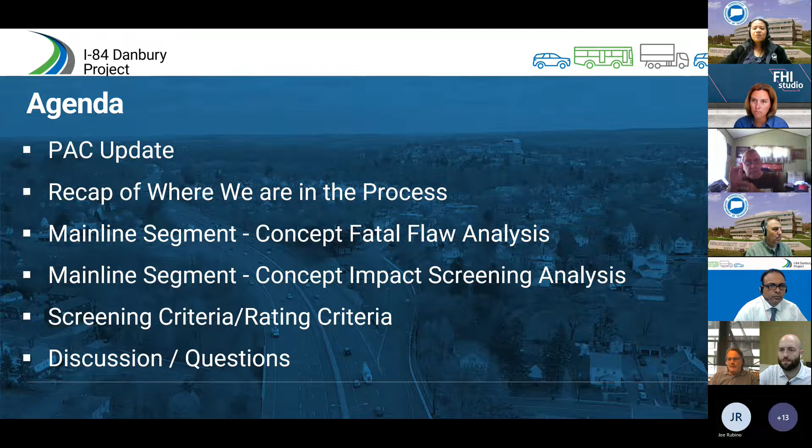Hello everyone, good afternoon. So for today's meeting, we're going to go over first, as usual, the PAC update. Then we'll recap where we are in the process. If you recall from our last PAC meeting two months ago, we talked about the engineering considerations, the environmental. So for today's meeting, we're going to go through one particular segment, the mainline segment, and go through the screening process of that. That's why we asked everyone in our email to specifically look at concepts 1, 5, 8, 9, and 22 — a total of 5 concepts, because we're going to look into that with the mainline segment. Then after that, we're going to go through the screening criteria, rating criteria, and we'll end with discussions and questions. Next, please.

So for the PAC update, since our PAC update 2 months ago, we added more concepts on our website. There should be 14 concepts, between 1 and 14, plus concept 22 on our website.

Then 2 months ago, we also attended the leadership meeting hosted by the Danbury Chamber of Commerce. It was me and Sharat who attended this meeting.

We also attended pop-up events in the city of Danbury. We're also active on our social media accounts, Instagram, Facebook, and Twitter. Lastly, we don't have any changes with our PAC.

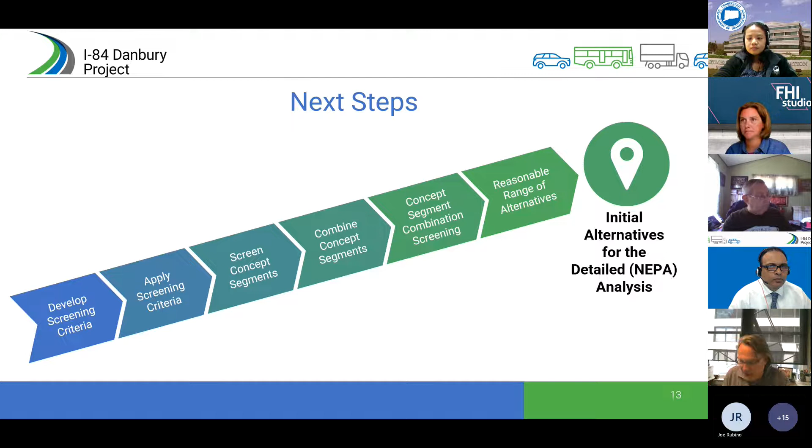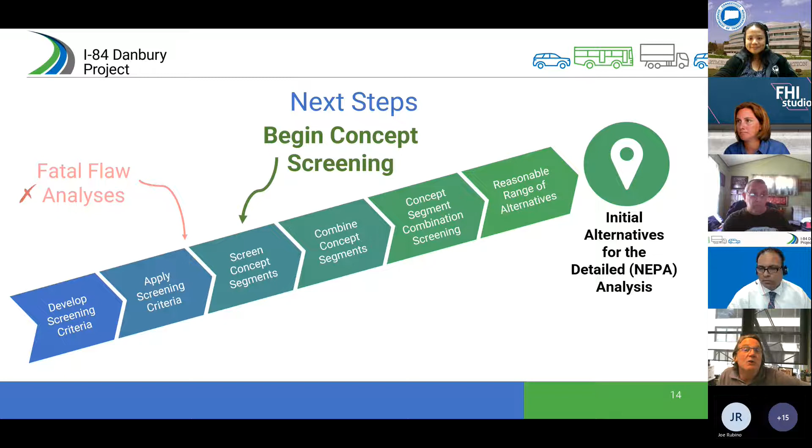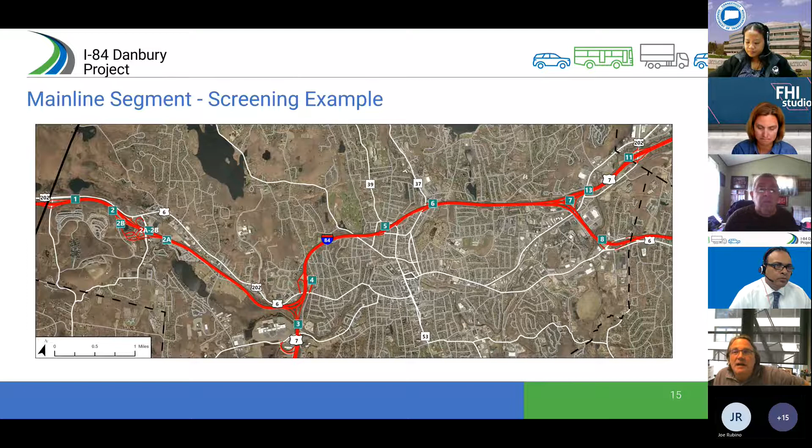As you remember, we've shown this arrow multiple times, and last time we talked about our fatal flaw analysis, and we've now begun to screen each of the concepts. This meeting will show only one segment, the mainline segment. The mainline segment goes through the entire corridor. We've also broken this out, because of the complexity, into the west segment, the center segment, and the east segment. But today we're focusing on the entire mainline segment, and we've labeled some of the main roads so you get a feel for where this mainline is.

In our screening process, we've gone from fatal flaw to redundancy to this impact matrix analysis. Chrislene reminded you that the 5 concepts proposed for the mainline are: concept 1, add a lane; concept 5, the left to right hand ramps; concept 8, I-84 under a collector distributor road; concept 9, Route 7 express lane in the median; and concept 22, I-84 express lane in the median.

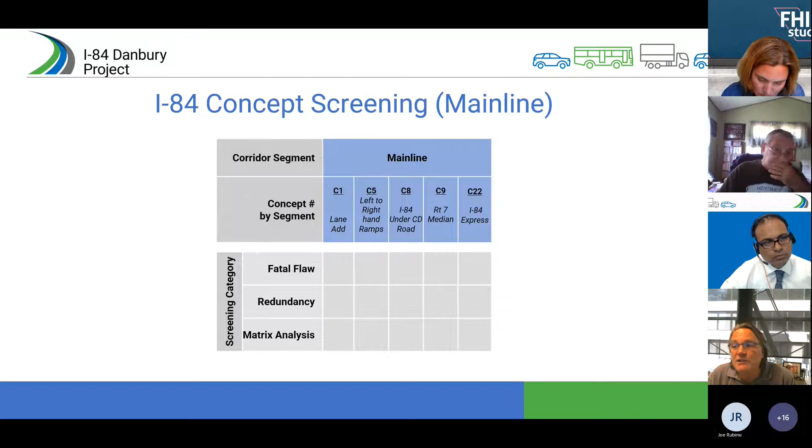How we're going to present these is we'll go through them, and we'll let Sharat describe the different components of some of these concepts. Our first one is concept 5, the left hand to right hand ramps for the mainline. Sharat, do you want to talk about it? We've highlighted 2 areas here. Can you give us an update on what these actually mean?

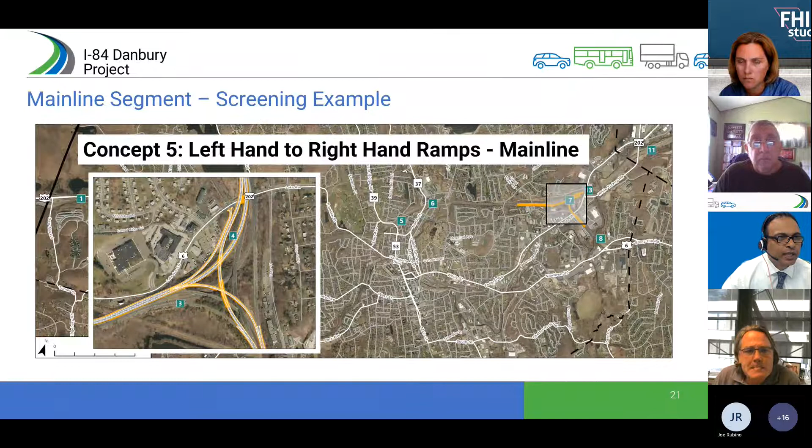Sure. Concept 5, the left-hand to right-hand ramps, came about around the same time as concept 1 with the lane add. In concept 5, we are looking at interchanges 3 and 7 and just switching the ramps from the left-hand side to the right-hand side. At interchange 3, we are switching the northbound Route 7 ramp to 84 westbound to the right side; today it's on the left side. Then the westbound 84 to southbound 7 movement, we are also switching to the right side at interchange 3. Similarly at interchange 7, we are switching the 84 eastbound off-ramp to the right side to Route 7 north, and the movement from Route 7 southbound that comes on the left side of 84 eastbound is switched to the right side. We're not making any other changes besides those 2 interchanges in concept 5.

The next concept is concept 8, where I-84 actually goes under the collector distributor road for the mainline. We've got 3 specific locations, one to the west, one to the center, and one to the east, that we can highlight to show what it looks like.

This concept came in the middle of our concept development process, and we were thinking about how we could take the through movement of 84 completely out of the Danbury area. The idea is to depress or lower 84 below grade at interchange 3 and take it all the way down below grade to interchange 8. Roughly between 7 and 8, 84 would be daylighting back again, so 84 would be entirely below grade there.

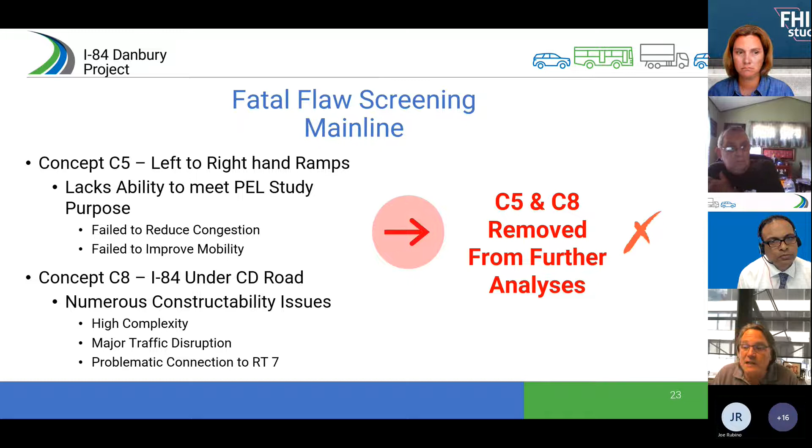It had major traffic disruption and was highly complex. So 5 and 8 were removed from further analysis through the fatal flaw screen. In our process, we go from fatal flaw to redundancy, and neither C1, C9, nor C22 were redundant in their functions, so there was no redundancy removal, and they made it through to the matrix analysis.

So if you recall, the whole mainline segment—Sharat, go over concept 1 and what that means. We've highlighted these three areas just so you can see what it would look like: here on the west, in the center, and on the east.

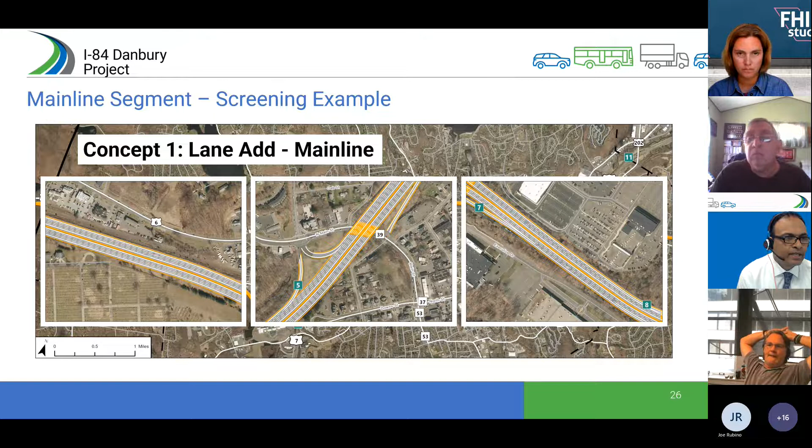This is the concept you probably saw the very first time, concept 1, where we just add a lane and maintain the lane continuity. We also switch, as part of this concept, the left-hand to right-hand ramps at interchanges 3 and 7. This achieves the benefit of maintaining the same number of lanes for through traffic across the corridor.

This is something you've seen at an earlier PAC meeting. Remember, this is a planning level—these aren't engineered, these aren't designed. This is Sharat's team coming up with the best visual we can show, but also note the width of the footprint for the add lane, because that'll come into play later when we're looking at impacts.

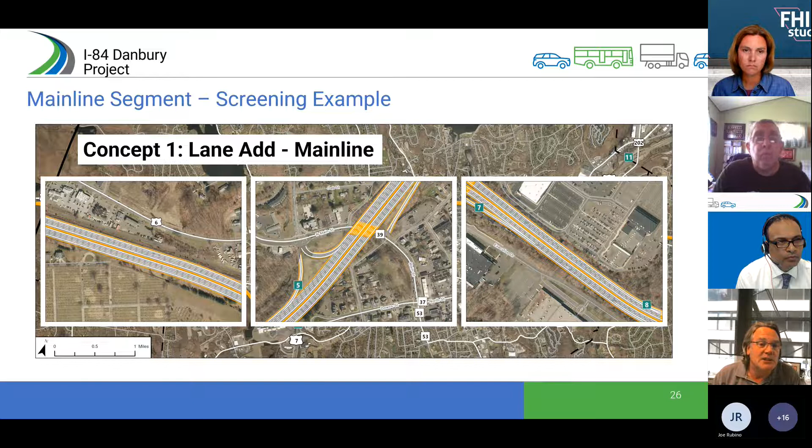Our next concept is concept 9. Once again, we picked three locations that highlight what these look like. That's when we're putting Route 7 in the median as an express lane, if you will, between the I-84 travel lanes. We've got one on the west side, one in the center, and one on the east side.

First, I'd like you to note the difference in width of the footprint. Again, I call this a crayon drawing—Sharat's team has put a lot more energy into it, but from a planning point of view, which is where we are in the process, we're just looking at conceptually what it could look like if we were to go to design.

So this one essentially provides Route 7 as an express. From interchange 3 to 7, Route 7 traffic does not have to mix with 84 traffic. All the Route 7 traffic would be in the median section in the two lanes, and they would be able to almost go direct connect to interchange 7 or from interchange 7 to interchange 3. There is a provision for local traffic on Route 7 to get off and onto the 84 piece of it to the sides, but between 3 and 7, Route 7 does not have any local access.

So it certainly provides a pretty straight direct connection for Route 7 traffic. As Rick said, this does provide a wide footprint. There's separation between I-84 and Route 7 with wider shoulders and barriers and things like that. So in comparison to Concept 1, the footprint from end to end is much wider than what it is there.

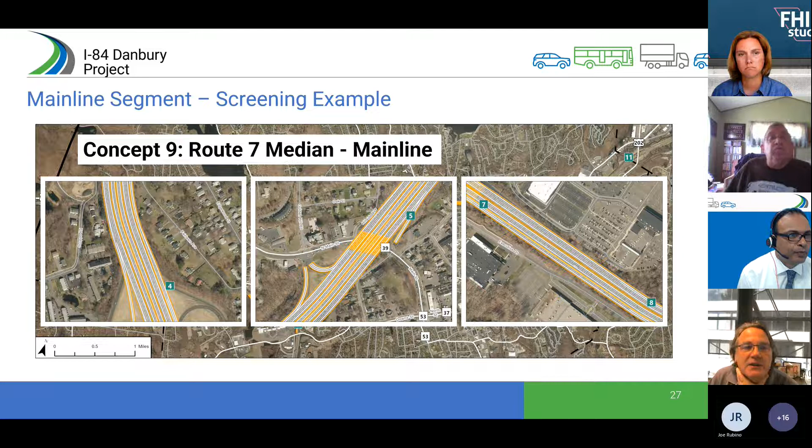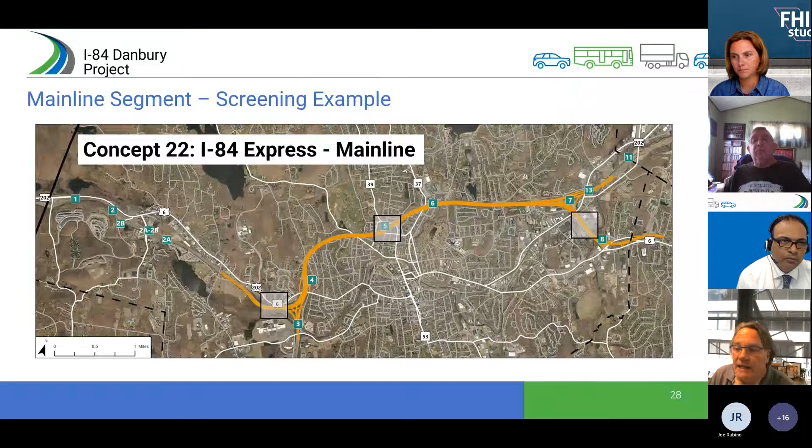Thank you, Sharat. And then if we go to concept 22, which is the I-84 Express, it would be in the mainline between the flow-through traffic on Route 7. Again, we've got three example areas: the first on the west, then the center, then the east. Again, notice, if you would, please, the footprint width.

So 84 Express is kind of similar to the 7 Express that we looked at before, except in this case it's 84 that's getting the privilege, so-called, where 84 traffic—especially traffic that does not want to exit at local interchanges, that wants to go towards Hartford or Waterbury and things like that—has the option of choosing to be on an express lane in the middle, and the local traffic from 84 can then use the road on the right side.

They would mix with traffic on Route 7 and 84, and on the right side would be accessing all the local exits. Ultimately both those roads meet west of exit 3 and east of exit 7 and merge together. But again, it's a wider footprint because we're trying to accommodate 84 express traffic in the middle and local traffic on the outside.

We call these concepts because they are conceptual and not fully designed. But we're taking these concepts and looking at the order of magnitude of impacts from these crayon drawings, from these conceptual designs.

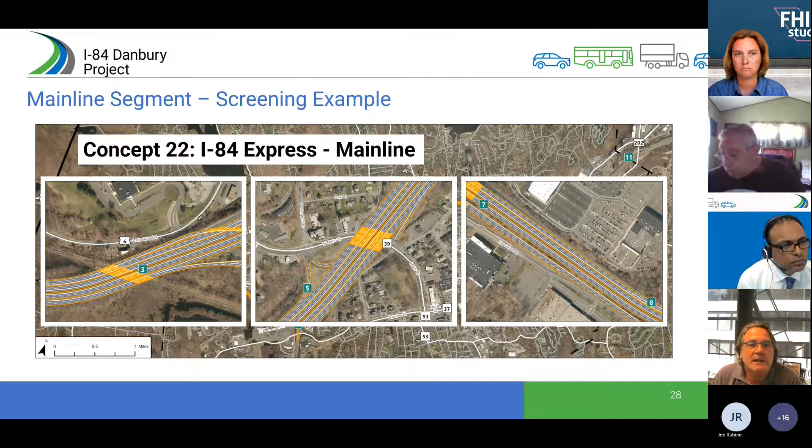If we go into our I-84 matrix analysis, you've seen these tables in other presentations, but let me remind you we have two types of matrices: one is engineering considerations, one is environmental. This one is engineering considerations, broken into key considerations and additional considerations. Key considerations are those that could strongly influence a decision as to whether we keep a concept or it fails through this matrix.

So in this example, for the main line, we looked at the reduction in travel time on I-84 in the morning and evening, and Route 7 in the morning and evening, and the reductions in the weaving amongst or between interchanges.

Sharat, reach through the screen and slap me and correct me if I misstate this. But these numbers are the modeled increase in delay that would happen at the design year of 2040 if no action was taken through this corridor.

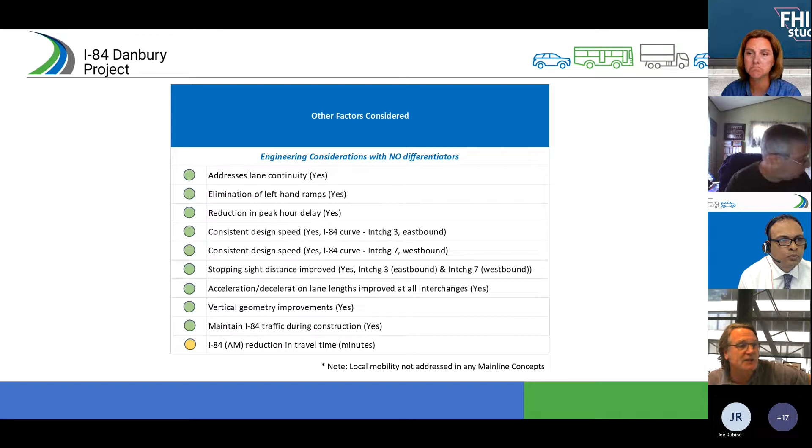So then we looked at the environmental considerations, and these mainly come in, if you recall, we asked you to take note on these concept drawings on the width. Concept 1 had a smaller footprint than did concept 9 and 22. Concept 1 was adding 1 lane to each direction on the existing footprint of I-84, where concept 9 and 22 had barriers and safe spaces and shoulders, as well as 2 lanes in each direction being added to the median.

So it doesn't surprise us to take a look and say our total number of property takes was much less in concept 1 than in 9 or 22. And a lot of those neighborhoods being impacted are sensitive and environmental justice neighborhoods, so concept 1 showed better than did 9 or 22. It's the same when we look at partial property takes and community facilities. We find that because the footprint is much smaller, concept 1 favored out.

Some of the non-differentiators we looked at were wetland type impacts, wetland and stream, and cemetery, and potential habitat for state listed species. They all impacted those resources to a similar degree. Also, everything is going to need a noise analysis, and there's a potential for floodplain impacts and impacts to the gas pipeline, and some visual and aesthetic impacts. And then all of them also performed to the same degree, but to a good degree, on the potential for 4F impacts, critical environmental impacts, listed state or federal species, and historic properties.

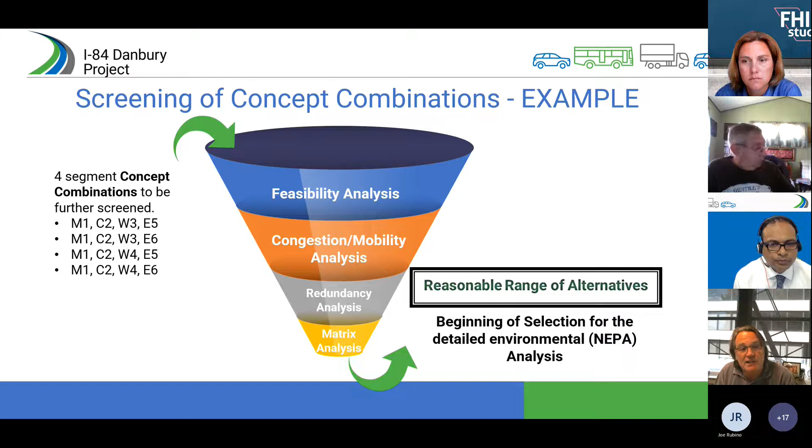Krishlene, were you going to go through this, or would you like me to? I was just thinking, Rick, maybe you take a pause and see if anyone has questions. A lot of information there.

Are there any questions or comments? Still looking pretty quiet. Oh wait, John has a question. Yeah, I have a question.

It looks like in the feasibility, concept 1 gets all the green lights. Thinking through the whole process, in past meetings we discussed the impact of accessing I-84 and Route 7 through Danbury, in other words access roads to get on and off the highway. What does concept 1, the green-lighted concept, do to minimize, alleviate, or help with accessing the highway?

Sharat, you want to take that? Yeah, I'll take that. So John, Rick, go back to the previous slide. This is just a piece, go to the next one. Yeah, this one, okay, this is just a piece of the pie. What we came up with for concept 1 is just doing the main line segment. As Rick said, there are 4 segments.

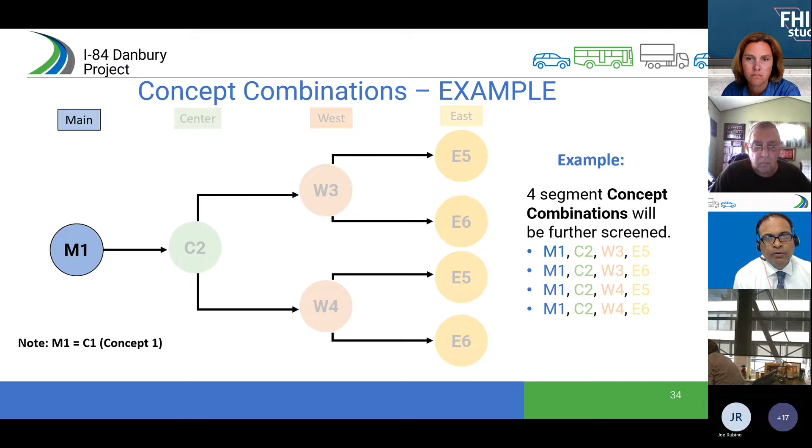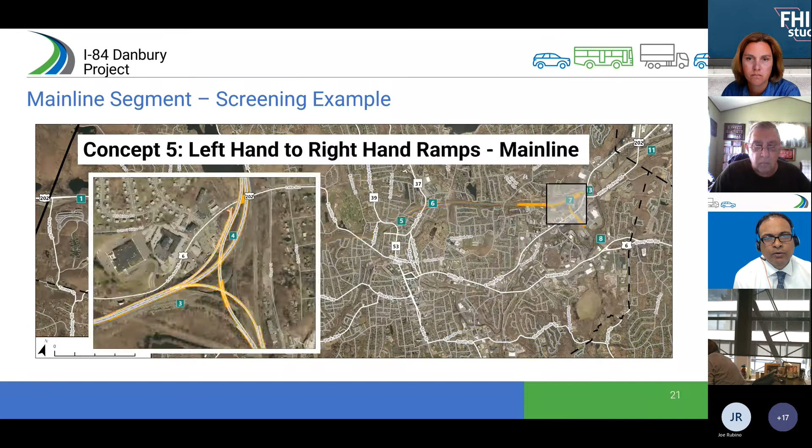And then we have something for the west where we talk about Lake and interchange 3, for example, so that's on the west side. On the east side, we'll get into interchange 7 and Newtown Road. Those are all part of a future discussion that Rick will talk about in the next steps. Those 3 segments are going to be in our next conversation on screening, similar to what we did for the main line.

So the main line just addresses the highway piece of it. What you're talking about here is local access, which will be addressed in one of those segments.

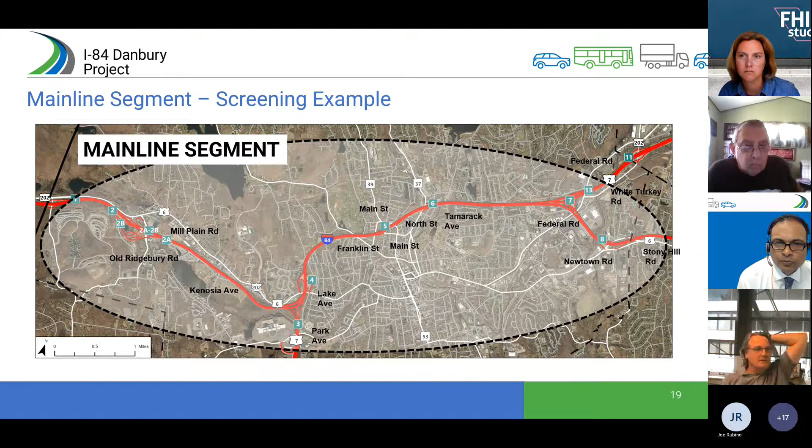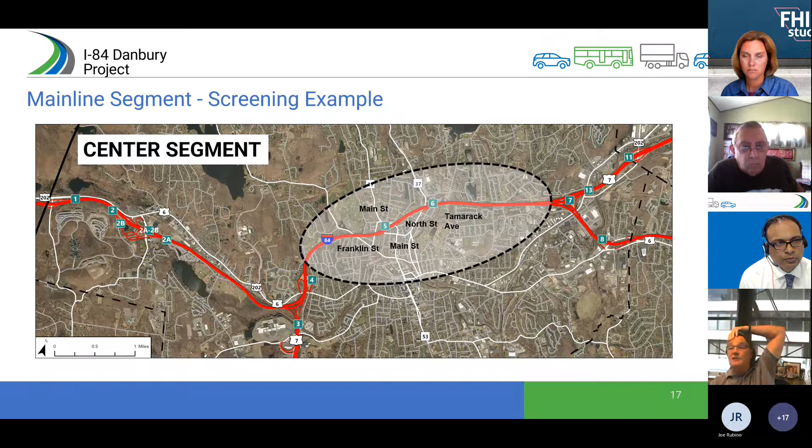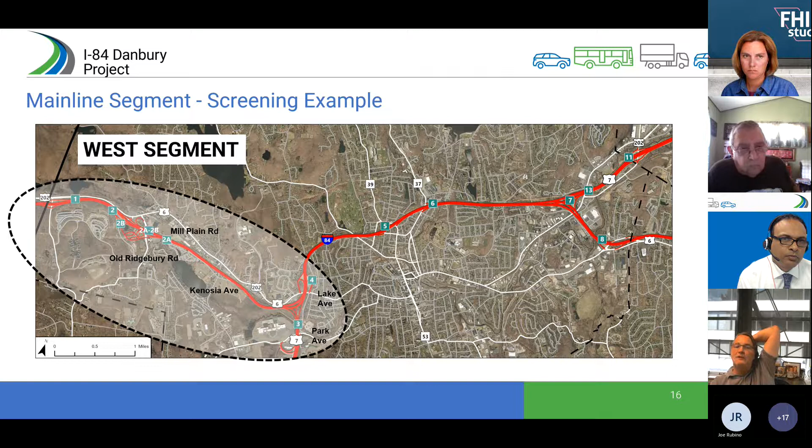As Sharad was saying, we will address these issues in the east segment and local access through there. Similarly, we will address Main Street and Tamarack and all of this access through the center segment, and then the access appropriately in the west segment. So John, this is exactly why it was broken down into segments, so we can better address these access points.

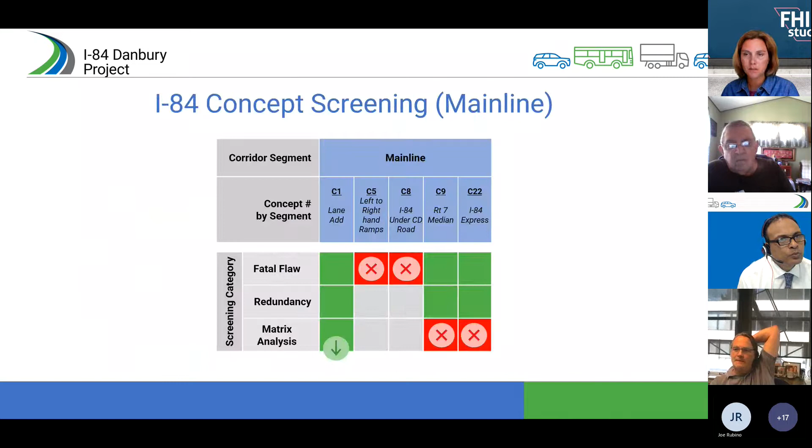Other comments or questions? I don't see any, Rick.

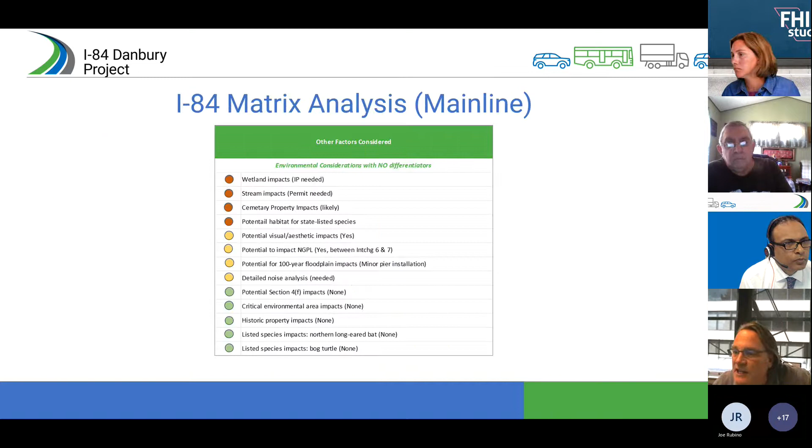Thanks, Marcy. So our next step is we are going to provide the entire PAC a set of materials. I'll show you, it's going to be these matrices, but without any dots. What I mean by that is we will show you all concepts that go into each of the 3 unscreened segments.

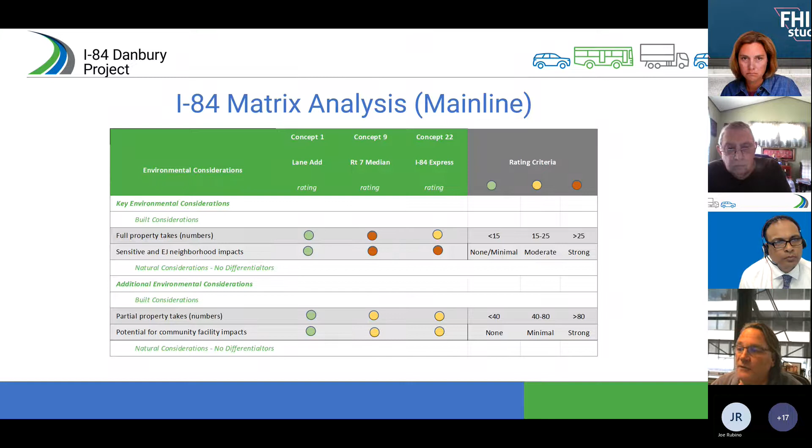And we will not have screened them yet, we will give you the tables. What we would ask of you in this next step is that you take a look at the west, center, and east and make sure that all of your concerns are met in 2 regards.

The first is, do we have every consideration in engineering, key and built, and environmental, key and additional in there to do our proper screening? And in the rating criterion, do you understand why we've chosen all those different criteria and the ranges of criteria, or the qualifiers like best, better, and great, or whatever we put in as a qualifier?

So we'd like to give you the time between today and the next PAC meeting to digest all of those. At our next PAC meeting, we would like to really open it up for a much more interactive discussion, so we can discuss all of the criterion and considerations and make sure everything you're interested in and have questions about is answered, and then we end up putting them into those screening processes.

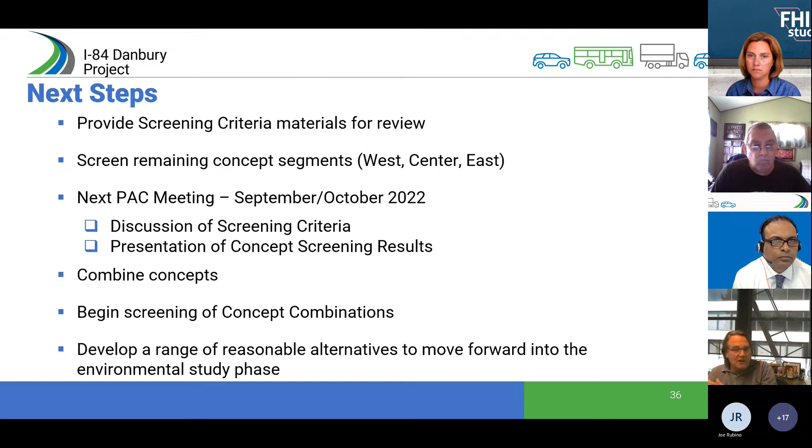So those are our next steps. I'll open it up for any further questions, either on the next steps or anything else you've thought of on either the engineering or environmental screening processes.

There's one thing I'll add. There are three concepts that are part of the screening process that are not on the website yet. We'll soon get those up, and you'll probably be notified when you're looking at the package Rick is talking about. That's concepts 15, 16, and 26. The rest of them are all on the website now.

Any comments or questions for Rick and Sherrod?